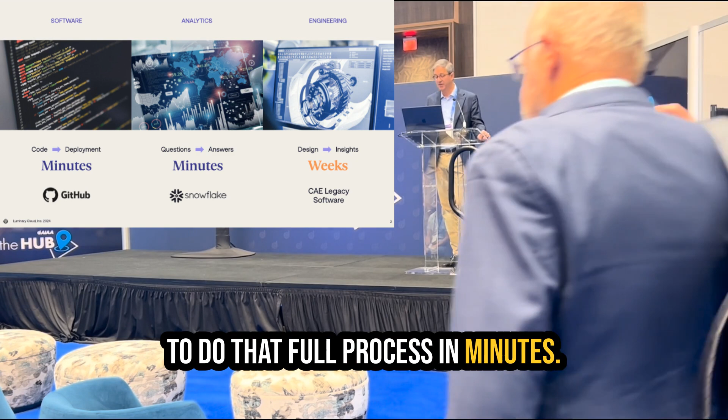So, before that, let me give you a little bit of context, because if you are a software developer, it is almost understood that you would go from developing code to deployment in a matter of minutes. And that's been largely thanks to many different companies like GitHub and others that enable us to do that full process in minutes. In the field of data analytics, for a very large database, it is also understood today that you can go from asking questions to getting answers in just a matter of minutes as well.

And yet, in the world of engineering, when you go from an initial design until you have credible and believable answers that you can rely upon in order to change a design, improve it, create a different product, we actually tend to take weeks. So this is something that is unacceptable to many of us in the community, and that I ascribe to the use of legacy software that's been around for over 30 years. This was not something that was unknown in the NASA Vision 2030 study. In fact, it was highly recognized that these were problems.

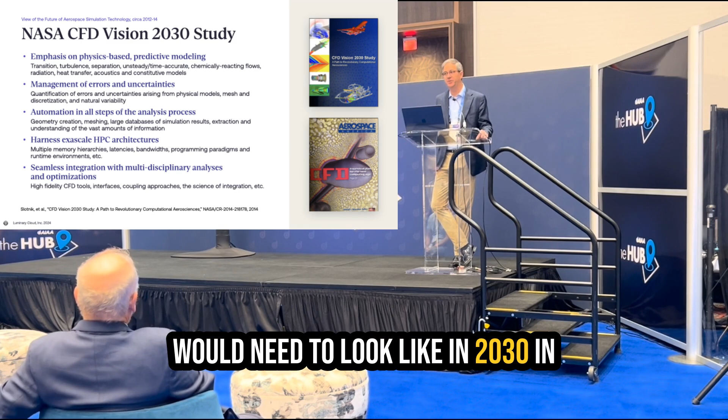And in fact, I had the pleasure of participating in this study led by Boeing to look and see what the future of computational simulation would need to look like in 2030 in order to realize tremendous gains in performance, but also in confidence and risk management for many aerospace systems.

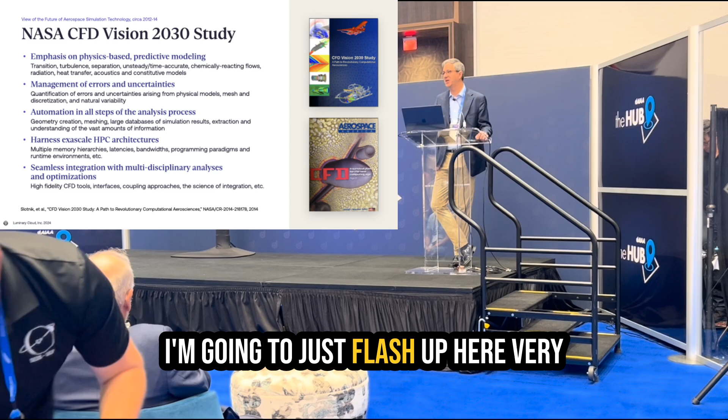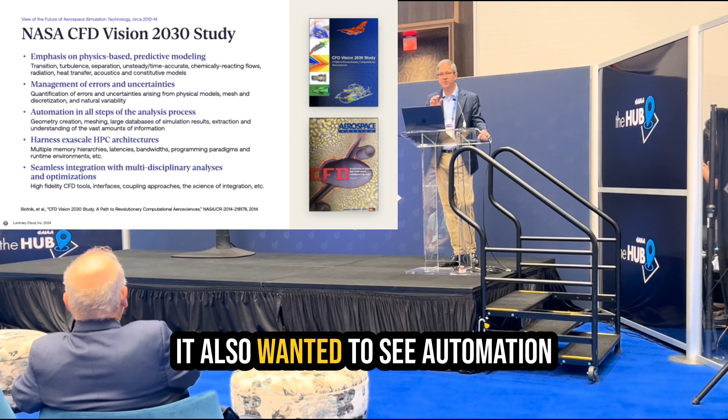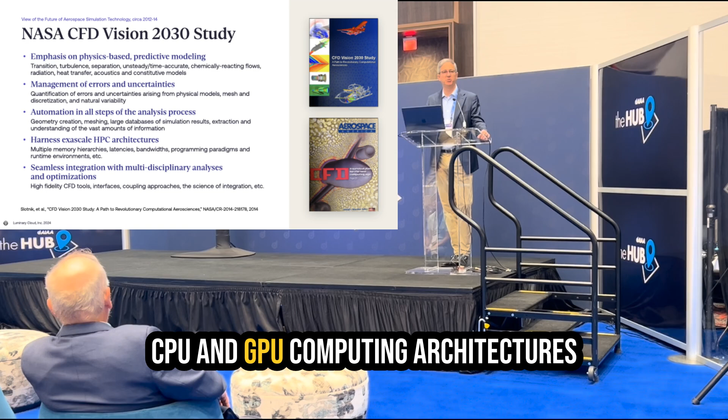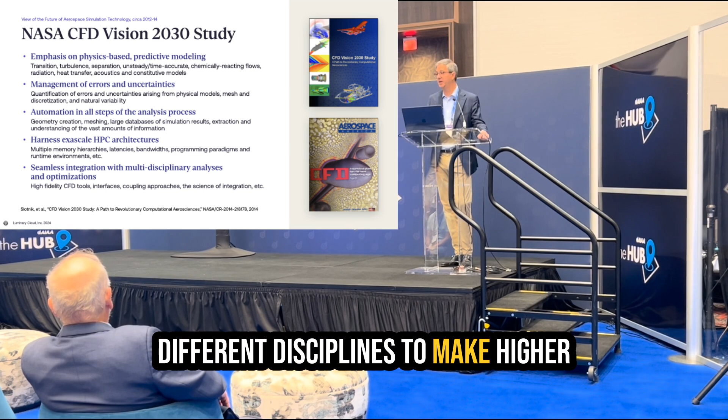The study had 5 main points that I'm going to just flash up here very quickly. It talked about emphasizing physics-based predictive modeling. It also discussed managing the numerical errors and the uncertainties present in the models that are utilized. It also wanted to see automation in many steps in the pre and post processing of the entire simulation process. And it also spoke about using modern CPU and GPU computing architectures in order to make sure that we can turn around the calculations very quickly. There was a final chapter that spoke about integrating various different disciplines to make higher fidelity simulation happen, but also looking at how we integrate everything and how we mine through the data that's produced through these very large multi-physics simulations.

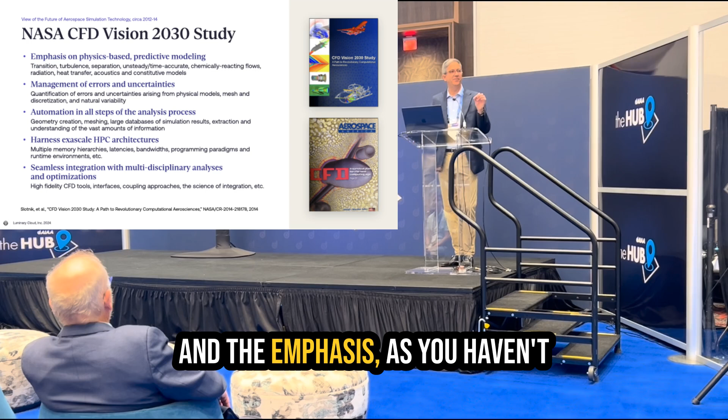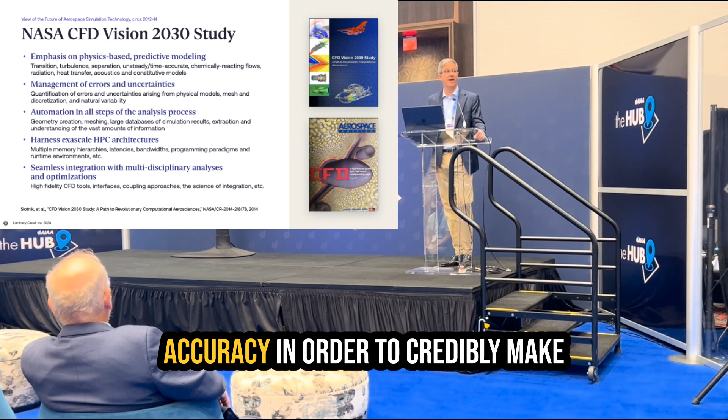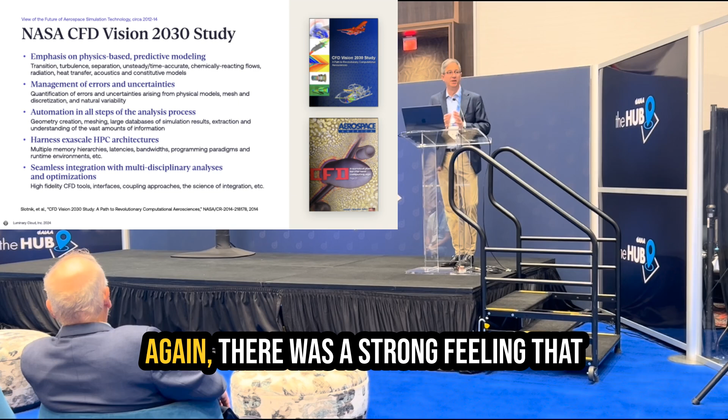And the emphasis, as you may have noticed by highlighting some of the keywords, was first and foremost on accuracy of the calculations. There was a strong feeling that for certain areas of the design envelope of an aircraft, we did not have enough accuracy to credibly make design decisions based on simulation. The second element that we looked at in the Vision 2030 CFD was the turnaround cycle of the calculations. Again, there was a strong feeling that these calculations took too long and needed to be accelerated, and we were trying to figure out ways of going from beginning to end of a single simulation much more quickly.

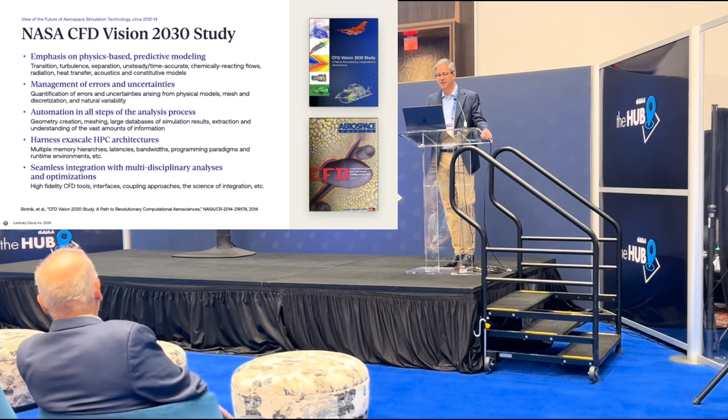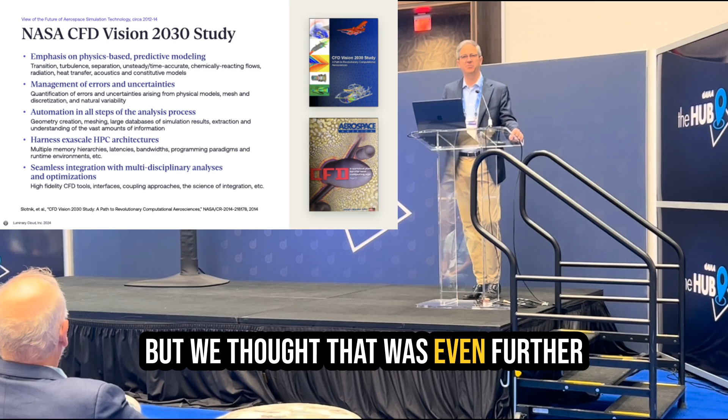And last but not least, there were a lot of elements of robustness, automation, and integration discussed in the report in order to make sure that the workflows that engineers in aerospace needed were actually completed. In addition, there were mentions here and there, although it was not a central part of the study, of outer loops, as I will call them today: repeated evaluation of the inner loop simulation for aero databases, uncertainty quantification, optimization, and so on. But we thought that was even further away, so we did not put as much emphasis on these types of loops. But these are the things that the CFD Vision 2030 study.

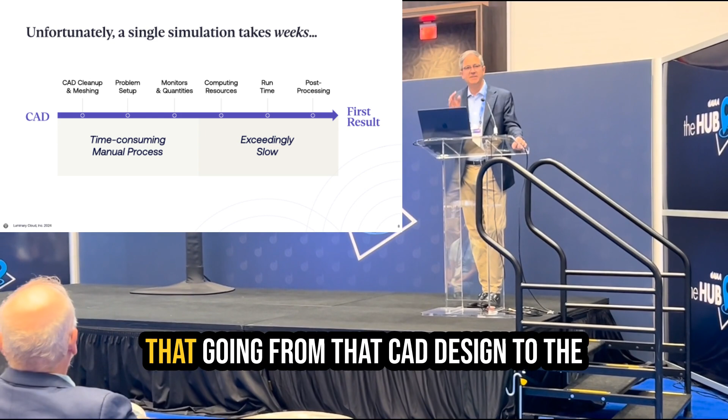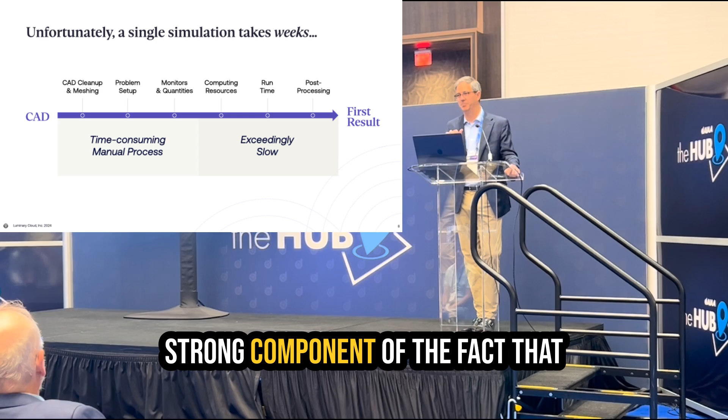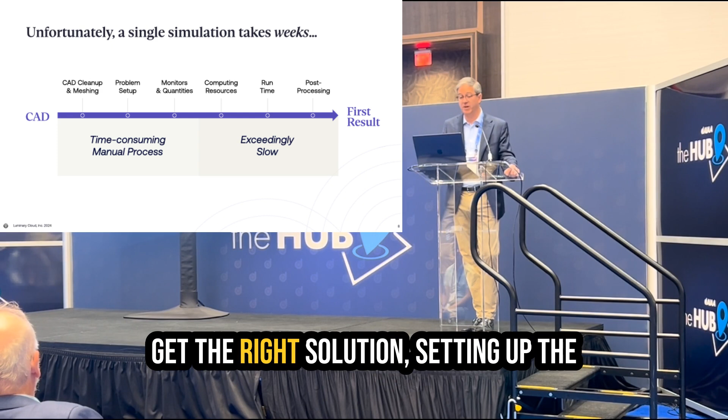And the situation at the time, which is not different from the situation about 4 or 5 years ago, is that going from that CAD design to the first believable and credible results from simulation just takes too long. And it's no surprise to many of you in the audience that this has a very strong component of the fact that you have all these manual and time-consuming processes that take place before you even run a simulation: CAD import, CAD cleanup, mesh generation, refinement of the mesh so you can get the right solution, setting up the calculation and making sure you get the information you want out of that calculation.

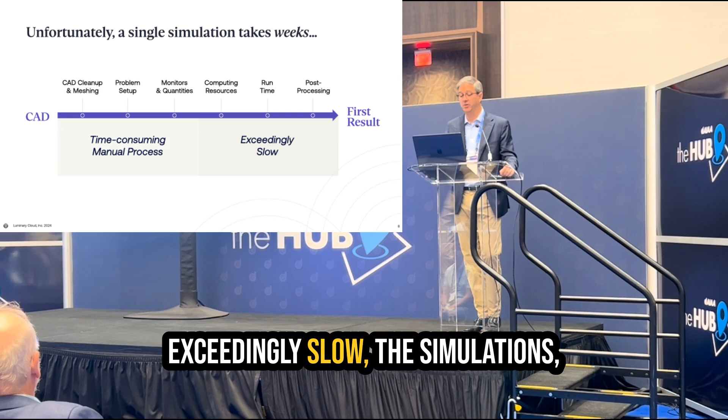And of course, once you're ready, the runtime of the simulations that is typically exceedingly slow, but also gathering those resources that you need and then doing all the post-processing. So all of this intuitively leads to some basic shortcomings in aerospace product design.

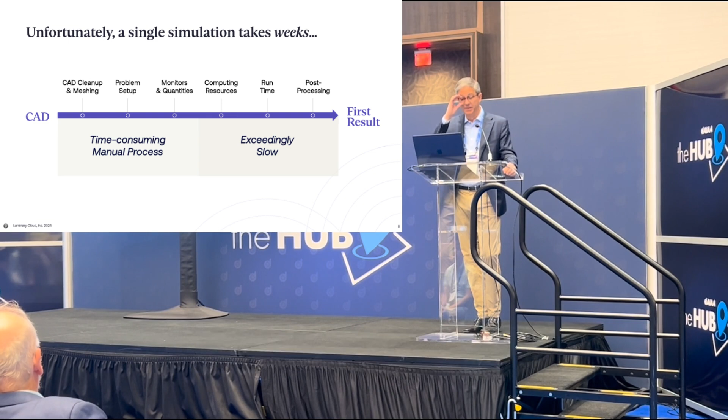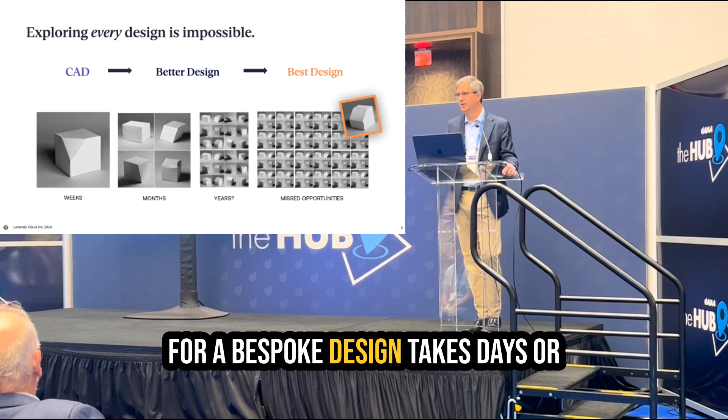In particular, for those of us who are interested in optimization, and by that I mean looking at various different alternatives and trying to pick the best one, if the individual simulation for a bespoke design takes days or weeks to actually complete from beginning to end, looking at all the alternatives that is necessary in a typical aircraft program actually takes so long that it's impossible to arrive at what we would call that elusive best design.

Everybody in here probably intuitively understands that if you shorten the time to a single simulation, you can actually enable these outer loops where ensembles of simulations are actually necessary, and I'm going to be speaking about that today.

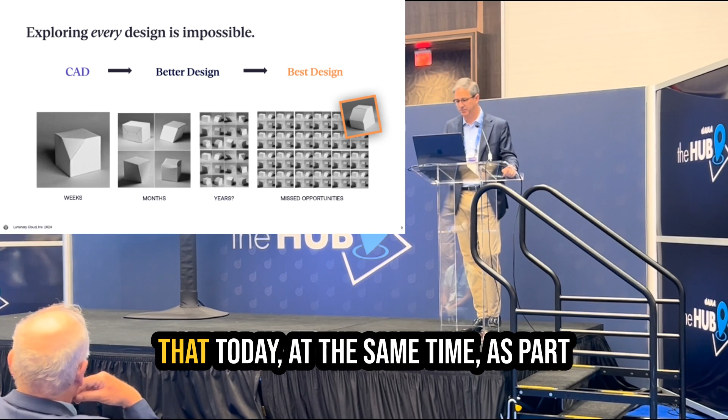At the same time, as part of the context, the backdrop of computing since we released the 2030 study has changed dramatically. At the time, supercomputing was mainly based on bespoke chips, accelerators sometimes if you had them, but also the communication fabric, the individual operating systems, and so on.

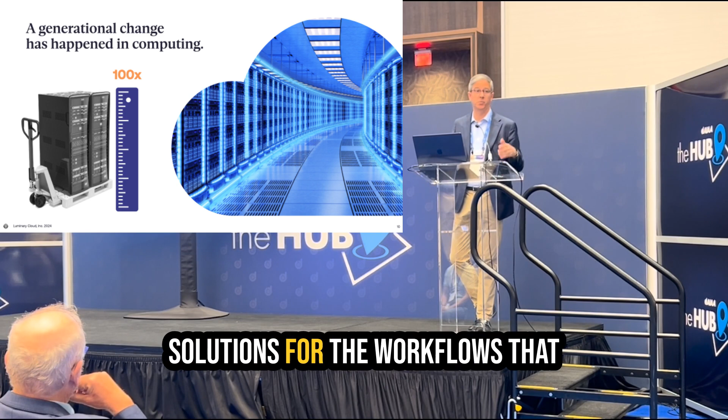Over the intervening time, the emergence of the cloud is an undeniable wind at our backs, where the amount of computational resources, due to the commoditization of those supercomputing resources, has come to dwarf the actual computational capabilities that even large companies have in-house or on premises. So new computing capabilities, new ability to do this in the cloud, the combination of the two being very powerful in terms of solutions for the workflows that require ensembles of simulations.

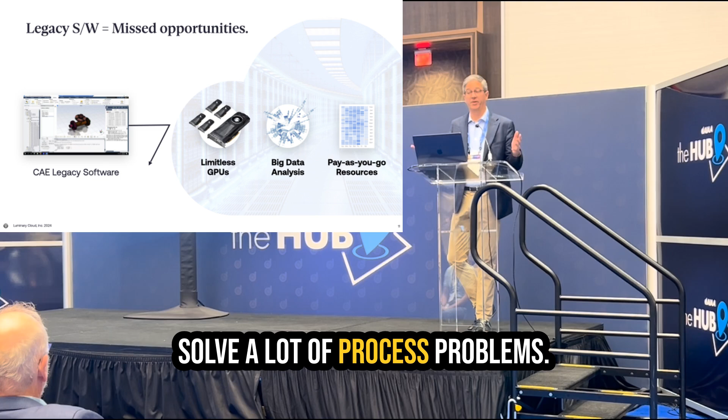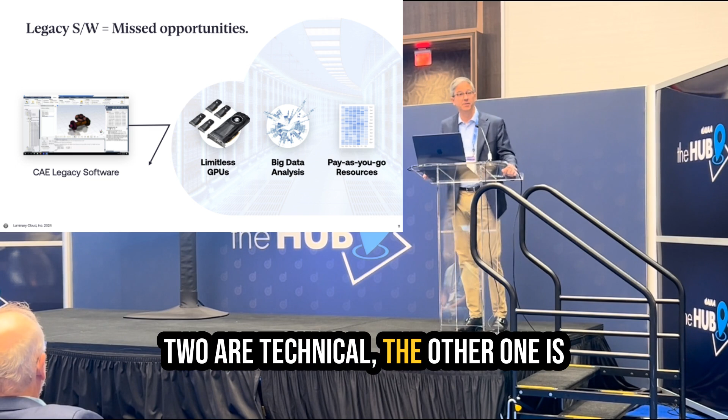At the same time, many people think that if you take the old existing software and you recompile it in a virtual machine in the cloud, that's going to solve a lot of process problems. But at the end of the day, if you just take legacy software and reinvent it in the cloud, you end up missing out on some key opportunities. And there are three that are highlighted there. Two are technical, the other one is more of a business element.

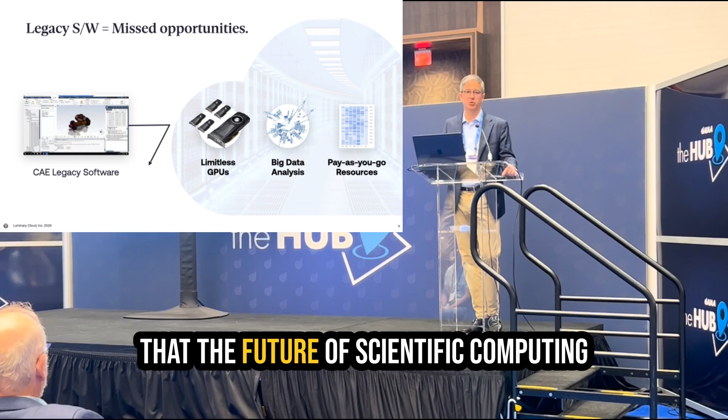The first one is the cloud is where all the GPU computing resources are going today. So if you think, like myself, that the future of scientific computing is based on GPU computing, you have to have available resources for GPU computing, and the large pools of resources are now in the cloud.

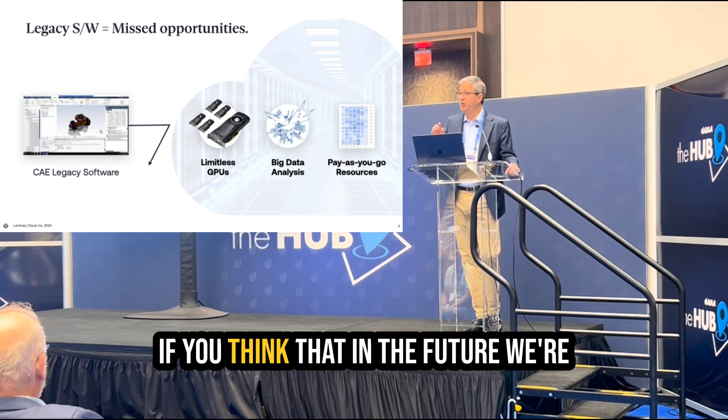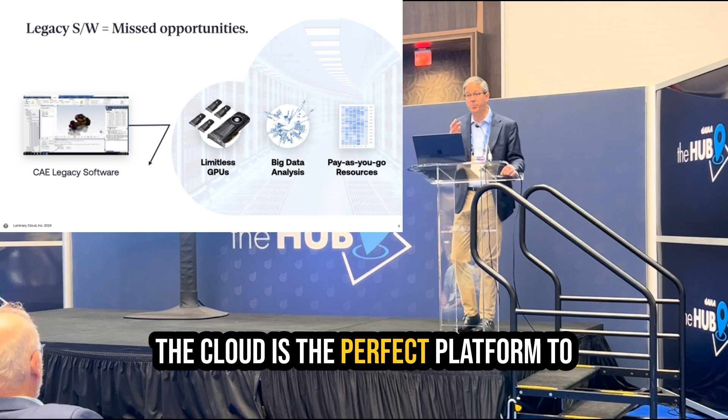If you think that in the future we're going to be running not one simulation at a time, but ensembles of simulations at a time, and we're going to be collecting all the data from those simulations to enable other workflows, the cloud is the perfect platform to have a logically contiguous, very large drive where you could do thousands of simulations and train models that you may then use for other purposes.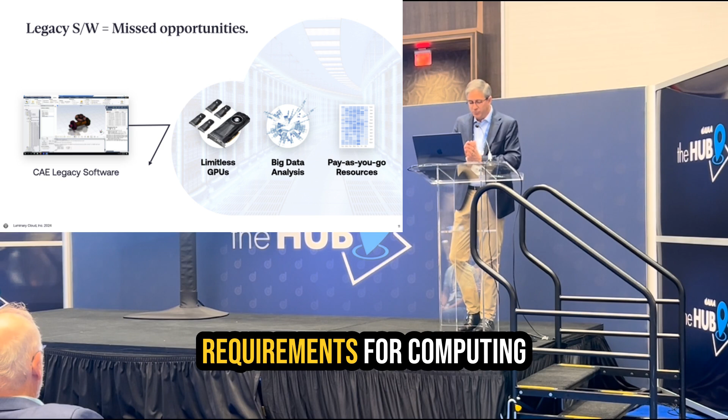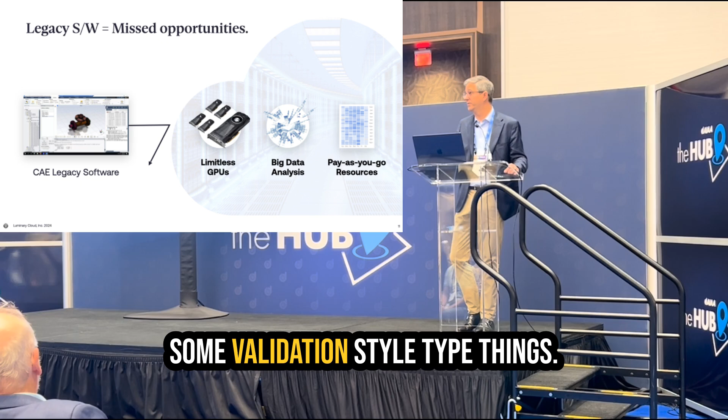And then, of course, the requirements for computing in aerospace are very cyclic. You can start with the need for running a few simulations, and then you want to run a database of 5,000 or 7,000 simulations, and then you go back to examining some validation type things. The ability of sizing the resources to your needs is really important.

So Luminary is a company that started 5 years ago. We just launched it about 2.5 months ago. So we were very quietly working on all these elements in order to make a framework of software that overcomes many of the limitations that we had seen, and frankly, that was inspired by some of the elements of the Vision 2030 CFD.

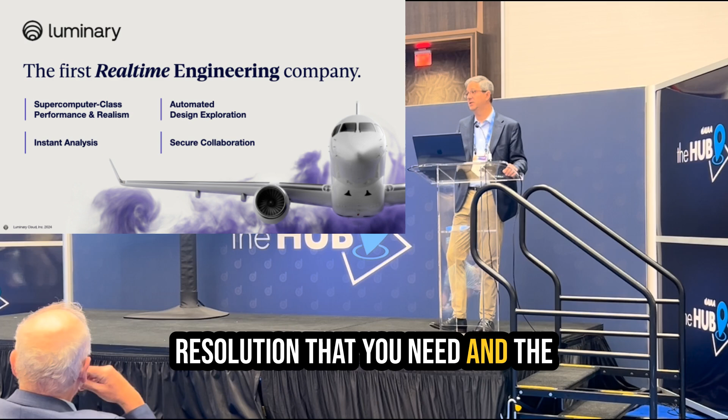It has 4 major components. We focus on delivering supercomputer class performance and realism. That means running the mesh resolution that you need and the actual models that you need specific for each purpose, but also running multi-physics simulations if that's what's required for the fidelity of the workflow. That, of course, is going to be done very fast. So I'll talk about 100 times faster in typical workflows, which means you can generate a lot more information than you were able to generate before.

So if that's the case, you have to have the ability to go through all that information, whether it's visualization, querying, data mining, et cetera, to extract valuable information from that data. Again, I'm very interested in design optimization. So for me, exploring vast design spaces in an automatic fashion has really been critical to my career, and we think it's a great way to improve aerospace products. So automated design exploration is a key pillar of what we built.

And then finally, of course, this is all in the cloud, so nobody wants to put their prized IP in the cloud without extreme levels of security. So security and collaboration are 2 things that are enabled by the cloud footprint. I go back to: why have we not realized the vision of 2030 CFD yet?

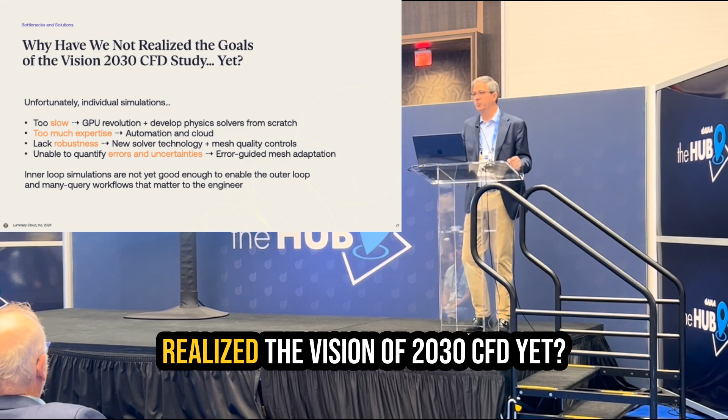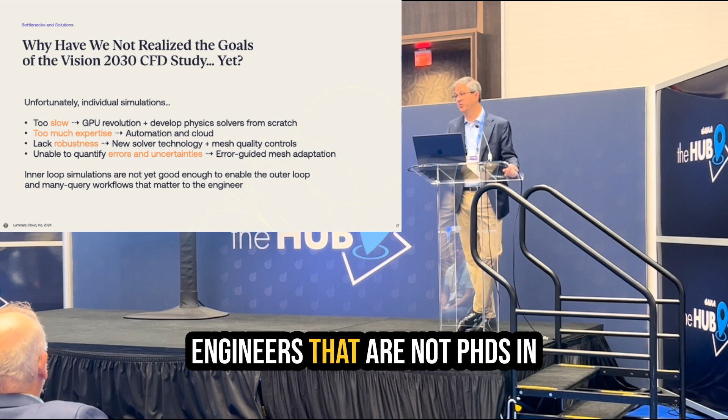It's pretty easy. Individual simulations are too slow. I hope everybody agrees. So they take hours and days versus minutes or seconds. It requires too much expertise, domain expertise, to receive accurate simulations out of the output. That is an impediment for many engineers that are not PhDs in computational science to actually use these tools confidently.

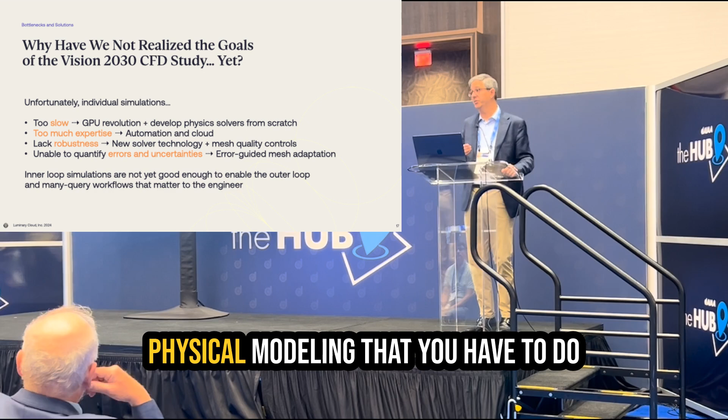Most of these simulations are solving nonlinear processes, so they tend to lack robustness. We've improved a lot over the years, but something better needs to be done. And then finally, the simulations themselves don't come with error bars for neither the numerical errors that are present in the model you're trying to solve, or the uncertainties from the physical modeling that you have to do in order to be able to do a simulation.

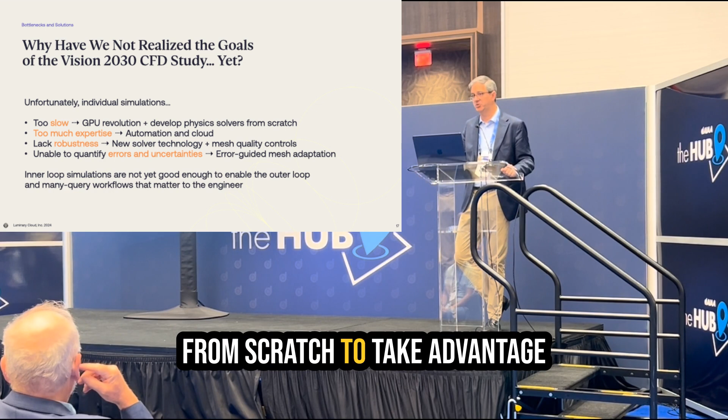There are solutions. If things are too slow, you probably guessed that I was going to talk to you about the GPU revolution, but also redeveloping software from scratch to take advantage of the new computational platform that is provided by GPUs. When we say it takes too much expertise, that actually requires error estimation, which you'll see at the bottom, but also a lot of automation and many of the cloud resources that I talked about.

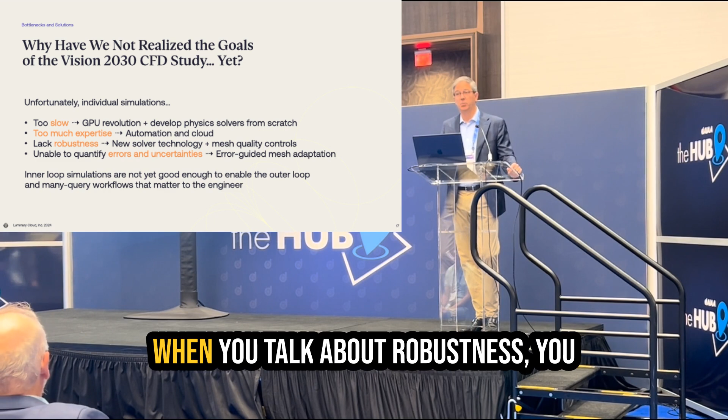When you talk about robustness, you really have to rethink the way you do linear and nonlinear solvers, and the way in which you have multiple options in order to backtrack and try various different things, such that most of the time, if not always, you actually get an answer to the calculation that you're seeking.

And then this is one of my pet peeves, but not having numerical error bars on simulations is really unacceptable for our community. As we move along, we have to not only understand what the output of a simulation is, but also the underlying errors that are included in that simulation. So I will contend that inner loop of simulations is hampered by all these things, and unless you tackle all of those, we're not getting over some of the elements that are hampering the progress in computational simulations.

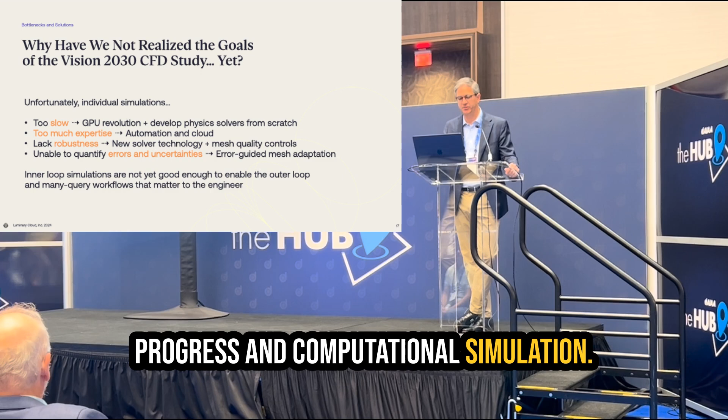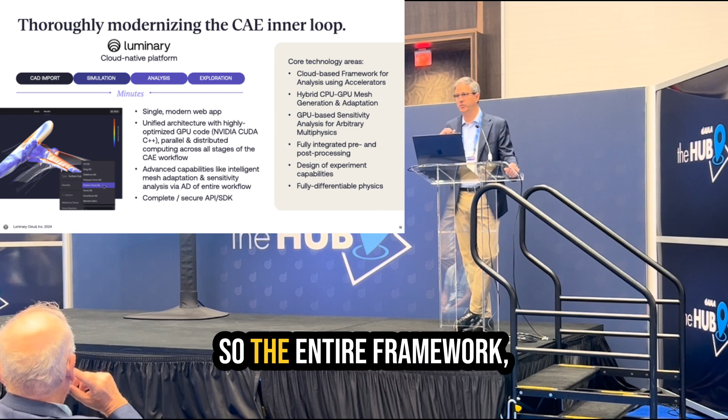So just one slide on Luminary here, just to show you, we've invested a lot in core technology areas that you see in the right side of the screen, where we started from the cloud first. So the entire framework, whether it's for geometry, I/O, visualization, it's fully cloud native. You don't have to move large files around, and you can query information very quickly.

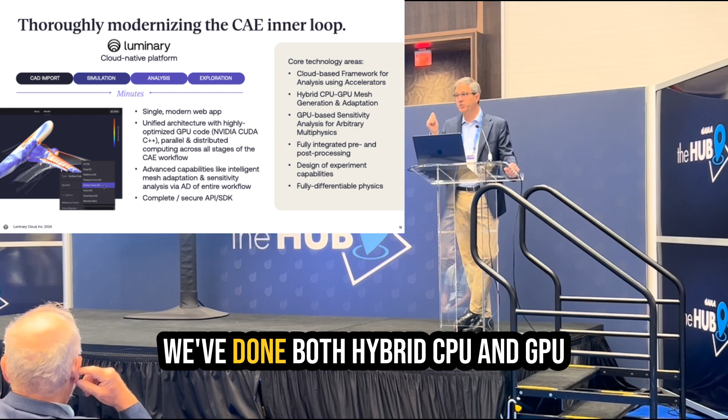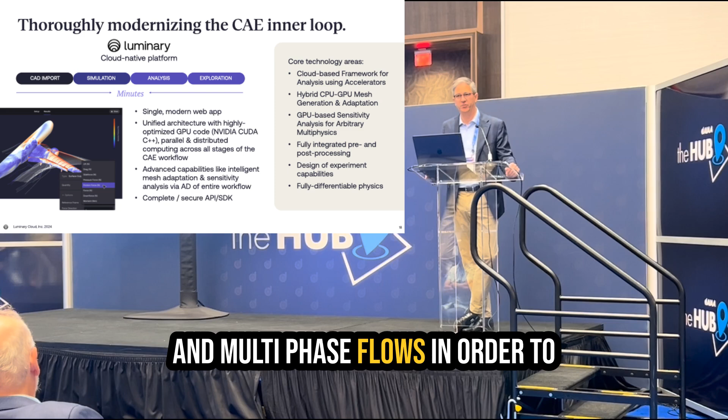We've done both hybrid CPU and GPU mesh generation and adaptation. So using the GPUs when possible and the CPUs when not, in order to automate and speed up greatly the process of mesh generation and adaptation. Of course, the physics has to be done with GPUs. So at Luminary, we've done compressible, incompressible, porous media, heat transfer, and currently working on aeroacoustics and multi-phase flows in order to achieve speed up in the turnaround of the computation that's unheard of.

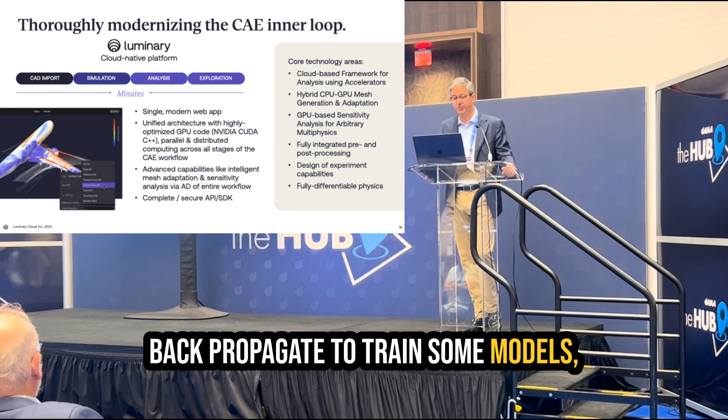Fully integrated pre- and post-processing, APIs, SDKs, making sure that the physics is fully differentiable if you want to do design optimization based on gradients, or if you want to backpropagate to train some models, and then of course having all kinds of design of experiment capabilities.

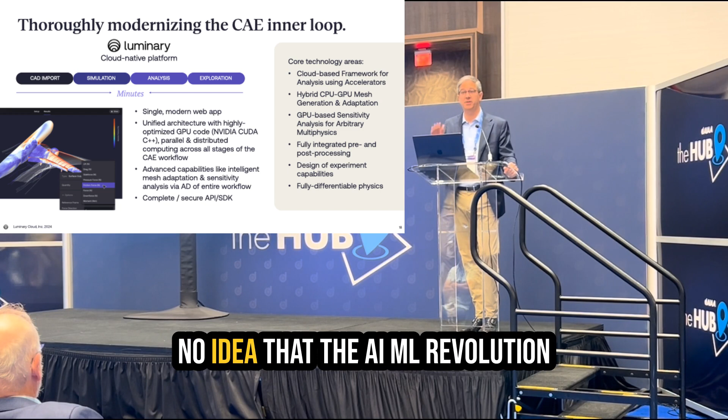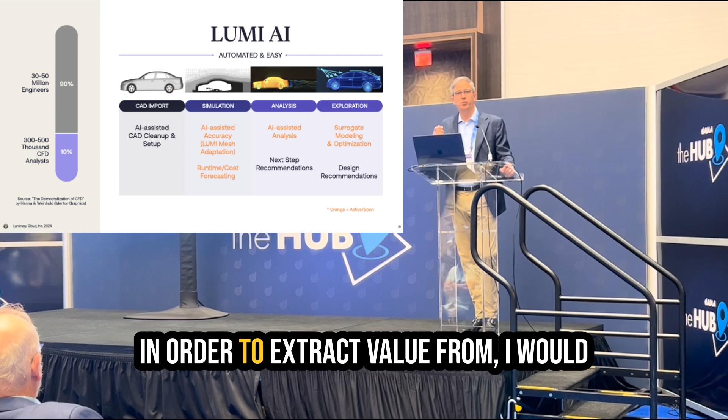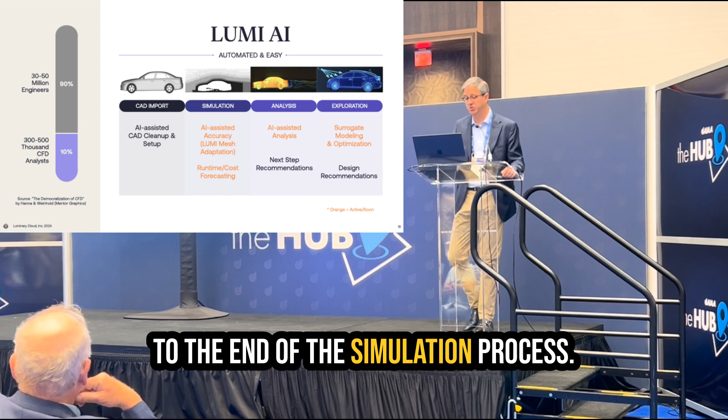So, at the same time, one thing that I think Mujib was talking this morning at the 2030 CFD session, and he correctly pointed out that we had no idea that the AI/ML revolution was coming, and therefore it was not mentioned in the report. We are also using the footprint in the cloud and the ability to simulate very often in order to extract value from ML and AI workflows, in the sense that it's not just replacing the flow solver by a regression of a number of existing simulations, but rather going end-to-end from the beginning to the end of the simulation process. So making things more automated and easy, starting from CAD import.

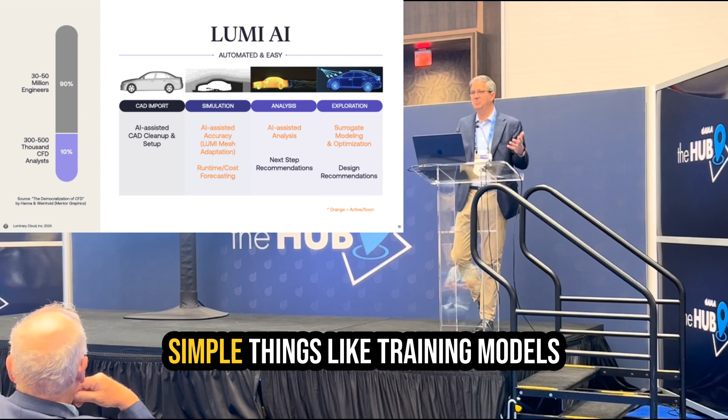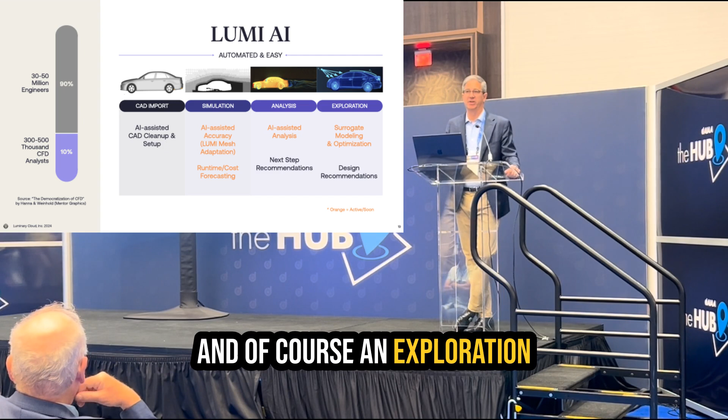Many techniques can be used to clean CAD more efficiently. To simulation, obviously, in order to get better accuracy, but even simple things like training models to forecast how long a simulation is actually going to run before you run it. In the analysis part, of course, there's a lot of AI-assisted analysis capabilities, but also beginning to give next step recommendations, and of course, in exploration, looking at surrogate modeling, optimization per se, but also additional design recommendations.

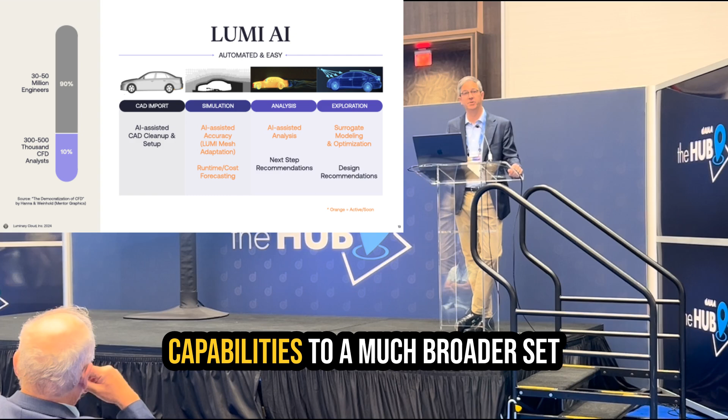So all of these things are also being worked on, and the reason to do that is to open up the use of computational capabilities to a much broader set of people than the experts alone. Okay, so let me try to go very quickly and wrap up in a few minutes. The initial simulation, which I'll call the inner loop of a simulation, is what's up there on the screen. From a geometry to a first result, that actually gives you confidence in the result. Of course, that by itself is extremely useful.

Repeated evaluations of this inner loop, as I would call it, can actually give rise to lots of potential uses in many areas that we're all very familiar with, so I will not have to read them. But it's very important to think that if you can get that inner loop simulation fast, accurate, and robust, you enable the outer loops.

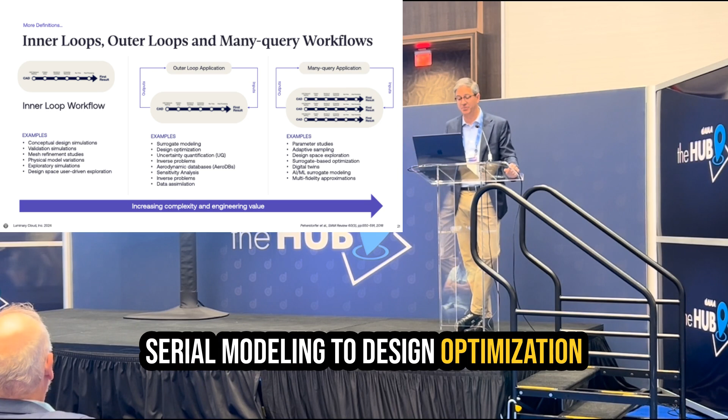And outer loop applications are ones that provide certain inputs to the inner loop evaluation and receive outputs, and depending on the outputs and the inputs, it continuously reacts to create new and more interesting engineering workflows. Of course, that relies on the repeated evaluation of that inner loop, and it makes possible lots of things from surrogate modeling to design optimization to databases to sensitivity analysis, including global sensitivity analysis, and even data assimilation type tasks.

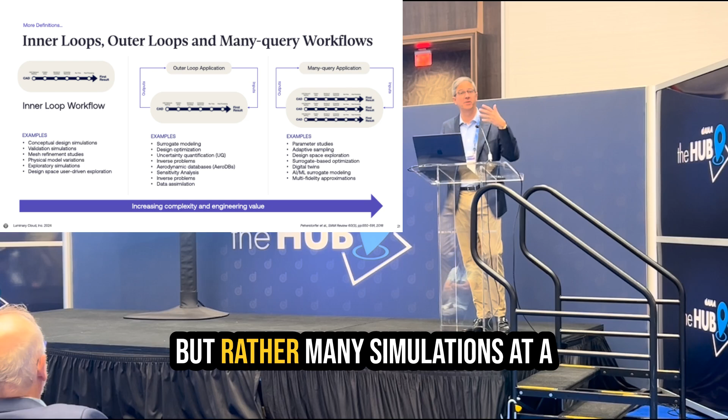Finally, similar to this, but not doing one simulation at a time, but rather many simulations at a time, are many-query simulations where inputs are provided to an evaluation of multiple simulations simultaneously, enabling a whole bunch of different workflows, including parameter studies, adaptive sampling, digital twins, so on and so forth.

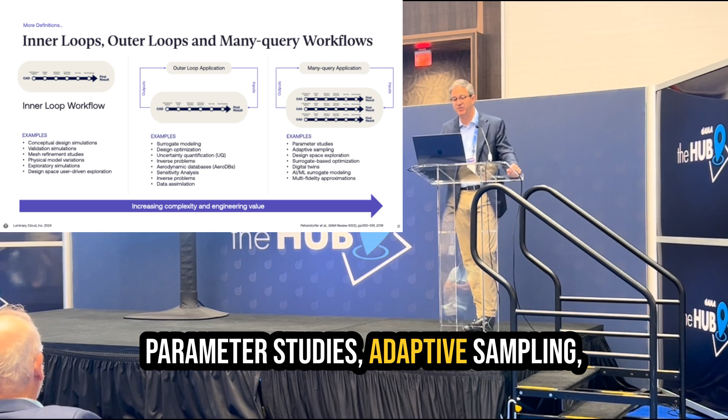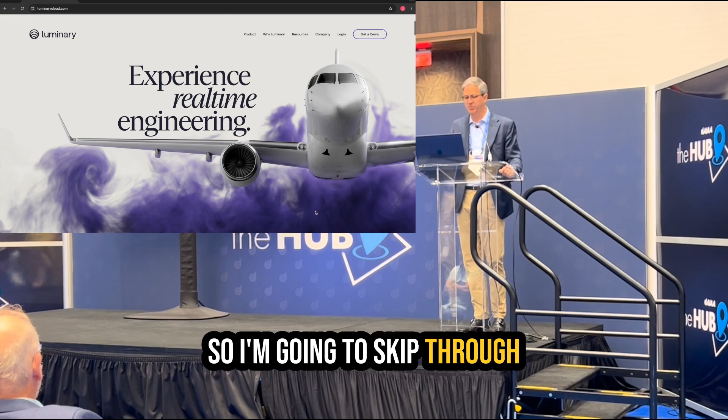And I'll maintain that in computational science, going from the left to the right increases value, but it also tremendously increases complexity, and therefore the reliance on that inner loop simulation being very accurate, very automated and robust, and of course very fast. So I'm going to skip through some of these things and just speak through this video so you can see the Luminary product.

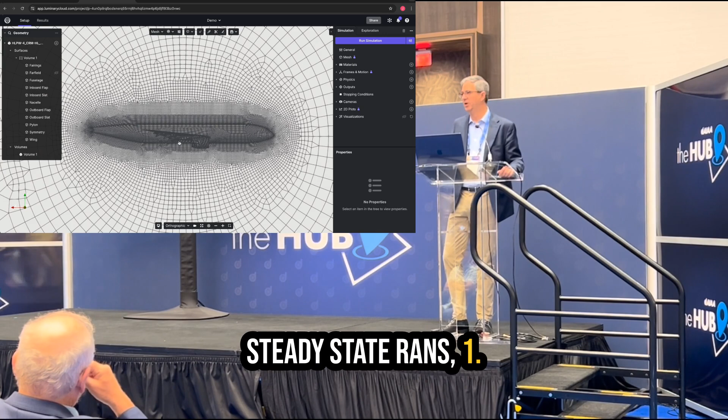This is an actual real-time video where, as you can see, a geometry was uploaded and a mesh that was pre-generated was put out. So we're going to run it at one of the high angles of attack. So this is 21.7 degrees. It's a 35 million cell mesh. Steady state RANS, 6 orders of magnitude convergence, y+ of 1, with an initialization that is going to be simply based on a free stream. So no cheating over here, I guess what I would say.

And when I clicked on run the simulation, the system began to actually allocate resources in the cloud. It found resources in the cloud, in this case 8 NVIDIA A100 GPUs, and it's beginning to upload the software. It's going to upload the mesh automatically without you having to do anything, partition it, and then begin running this individual calculation. It takes about 30 seconds the first time around.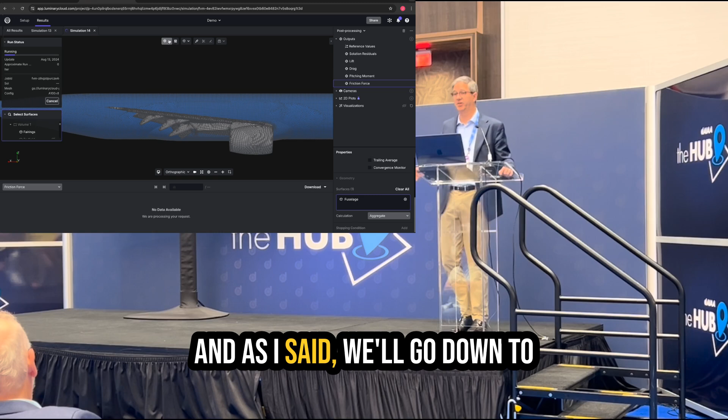Of course, if you run an ensemble of simulations, you're going to amortize that over many evaluations of the same model. But what you will see as soon as the calculation begins is the residual plot will begin here. And as I said, we'll go down to about 8 orders of magnitude. So this full calculation would have normally taken most of the existing software on CPUs, using about 256 CPUs, on the order of 3 to 4 hours to converge to the same level with the same type of mesh and the same sort of initialization conditions.

There you go, and you can see the calculation beginning to run, the residuals going down, obviously. In this case, you're going to see this calculation run in about 1.5 minutes. And it will run in front of your eyes. This is what it's doing right now. And the results will be immediately available to you through this particular interface, so you don't have to download anything.

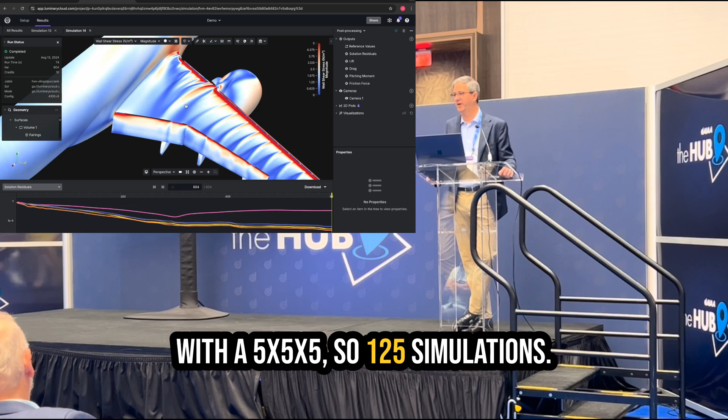So, in fact, right before we started this presentation, I started a design of experiments of this very same configuration and mesh with a 5x5x5, so 125 simulations. If I have time, I'll show it to you. If not, you can come by our booth and we can actually show it to you. But 125 simulations will run in the course of about 20 minutes of presentation.

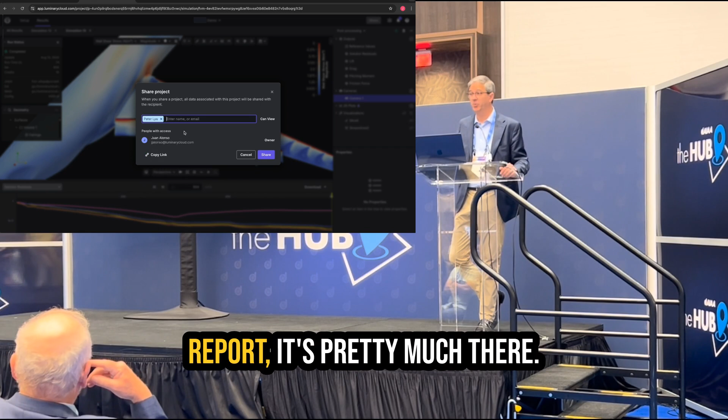So that calculation has now reached about 1,500 iterations. You can barely see the numbers here, and it'll very soon just conclude. This is literally a calculation that has taken several hours to do. We're at a point where at least the turnaround time vision of the NASA Vision 2030 CFD report is pretty much there. And as I'm going to tell you, it's going to get even better.

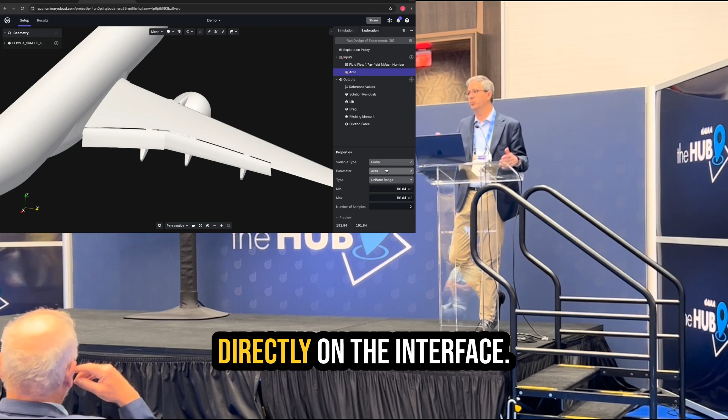So the calculation ran, the solution is actually being loaded as we speak, and the actual wall shear stress at the wall will be shown in just a minute. And you can do all kinds of investigations of that geometry and that actual calculation directly on the interface. And oh, by the way, I didn't mention this, but this is true software as a service. So all of that gets run from a laptop using the Chrome browser, not any particular workstation, et cetera. And you'll see me doing various other things there, but I'm not going to belabor the point.

Nobody wants to do the same simulation 100 or 1,000 or 10,000 times. So you really need to work on a cloud-based platform with APIs and SDKs that give you the full functionality of the product, but can be driven from a Jupyter notebook, essentially.

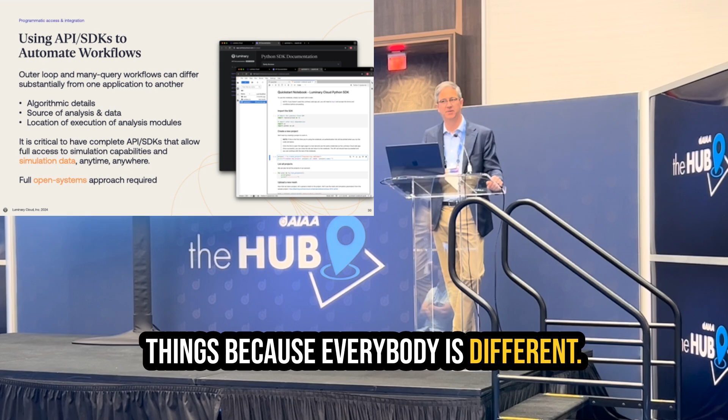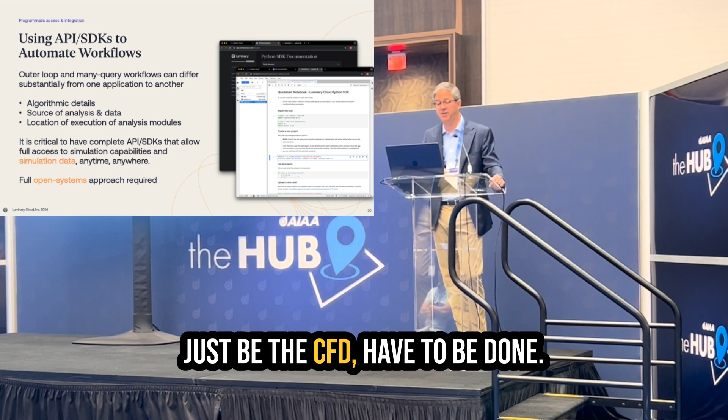So we've done that for all kinds of things because everybody is different. Everybody wants to do their optimization differently, their parameter study differently, their UQ differently, et cetera. So the algorithmic details, the source of the data, the analysis, the location of execution of various different modules that may not just be the CFD have to be done. We spend quite a bit of time making sure that, fully secure and fully authenticated, you can have this supercomputer available to you anytime, anywhere, data and computing resources available 24/7.

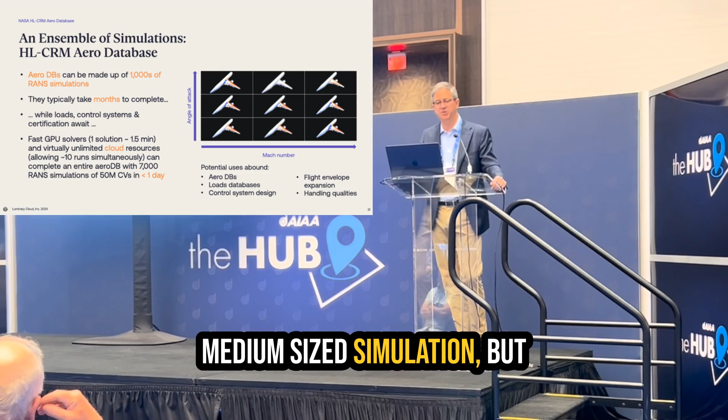Let me give you an example and some performance data so you understand not just a single medium-sized simulation, but rather larger simulations. Let's talk about an aero database, which typical aerospace companies will do with thousands of simulations, anywhere from 1,000 to 10,000 simulations, and typically take on the order of months to complete. This is steady-state RANS calculations. I'm not talking anything more sophisticated.

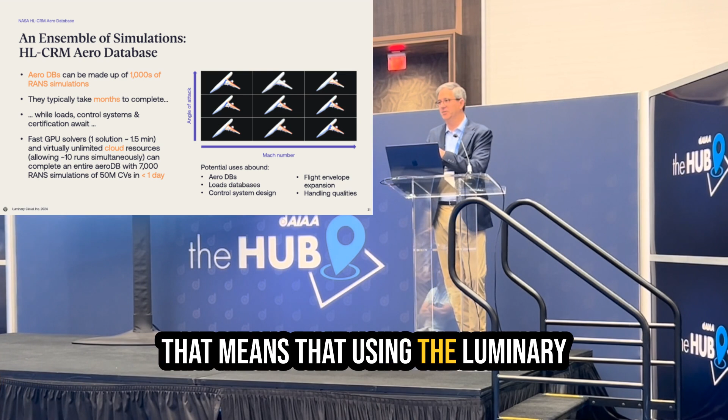Of course, the teams that are helping the design end up spending a tremendous amount of time, but I just showed you that calculation can be done in 1.5 minutes. If we actually reinitialize from the closest solution, the time goes down by about 20%, and if you end up doing other things, you could get this even shorter. That means that using the Luminary product, you could actually run a 7,000-simulation database of that size in under a day by only running 10 of them simultaneously.

So imagine what you might be able to do with all of these sort of capabilities if you were able to get an entire AeroDB for loads, for control system development, for whatever, in just one day. You'll probably do it many more times than just doing it once, and you'll probably fix some problems.

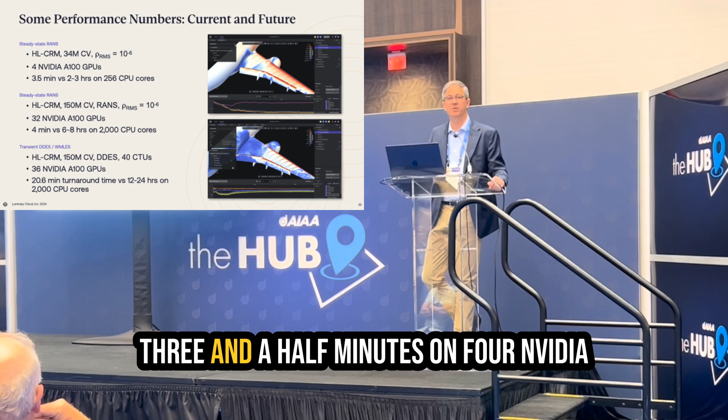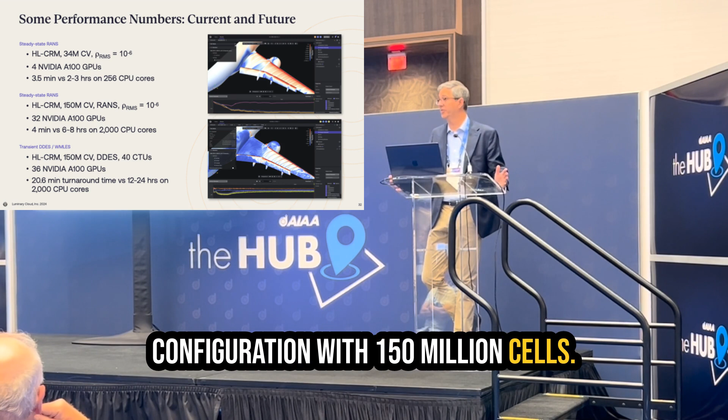Let me wrap up with some performance numbers, current and future, because I'll talk a little bit about extrapolation of GPU resources. Steady-state RANS, you saw with 8 NVIDIA A100 GPUs, but let's do this even more modestly. 34 million cells, 10 to the minus 6 convergence, 3.5 minutes on 4 NVIDIA A100 GPUs, what normally would have taken 2 to 3 hours on 256 CPU cores. Maybe you want to routinely run calculations on an entire aircraft configuration with 150 million cells. In this case, simply scaling the number of GPUs by a factor of 8 gets you to about the exact same execution time for the same convergence levels, right?

And oh, by the way, if you want to do a transient DDES or wall-modeled LES, what you end up seeing is that for the same 150 million cell calculation, and for 40 convective time units of time integration, of course the total execution time will change depending on how long you integrate, it can be done today on A100 GPUs in about 21 minutes.

So now, think about the A100s being the current or old generation. The H100s have been out, about 2.15 times faster. The new Blackwells that are coming out in the fall are expected to be twice as fast. You can get immediately this fall about a factor of 4 faster than the simulations that I have there. And if you believe that 3D memory will be stacked on top of GPU chips over the next 5 years, by the time we get to the 2030 timeframe for the NASA CFD vision, there's about a 40x improvement in performance that you're going to be seeing for these individual simulations.

So if you look at what that means: 150 million cell calculations in seconds, ability to run many of them simultaneously in a day, and transient simulations in about a minute within the next 5 or so years. This is really inspiring for many of us who rely on the execution of many different simulations simultaneously in order to do our work. And I truly believe this is where the world is going.

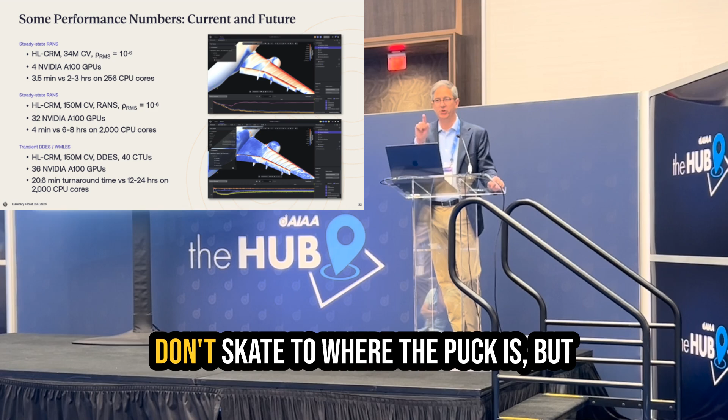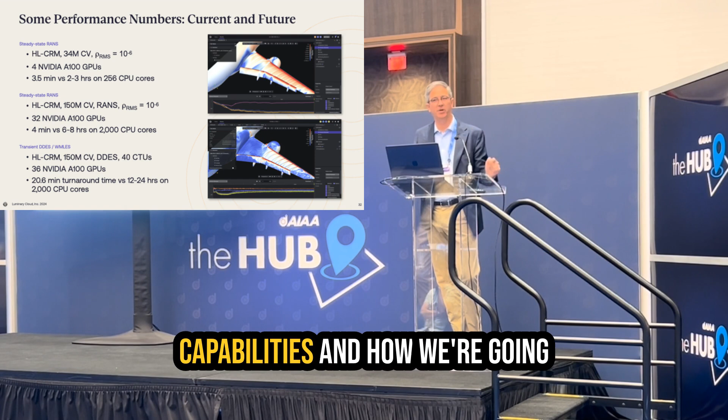As some of the hockey fans will know here, Wayne Gretzky used to say, don't skate to where the puck is, but skate to where the puck is going to be. This is where the puck is going to be in about 5 years or so. It's almost there in the current day. So we have to start thinking about what we're going to do with these capabilities and how we're going to harness that computing power and all the data that's produced.

So I'll stop by simply saying that I think there are some key elements of the NASA Vision 2030 CFD that are essentially realized today, and they'll be even more realized as we go along. There's some that we still have to make a little bit more headway in. There are new things that we didn't know in the NASA Vision 2030 CFD study were necessary. And I would say it's an exciting time to be around. I think new software developments are making amazing capabilities possible.